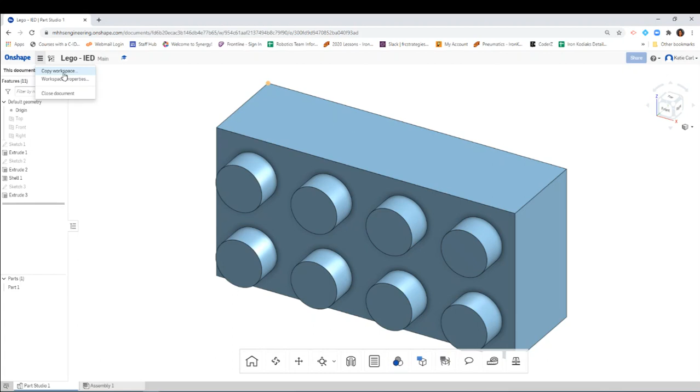Your next step, again, you aren't able to edit this one right away, so you're going to have to make a copy. Go up to the three horizontal lines to the right of OnShape. When you click on it, it tells you copy workspace, so go ahead and click on that option. I'm going to go ahead and change it to my initials and my class period, so KC period 2, and then go ahead and click OK.

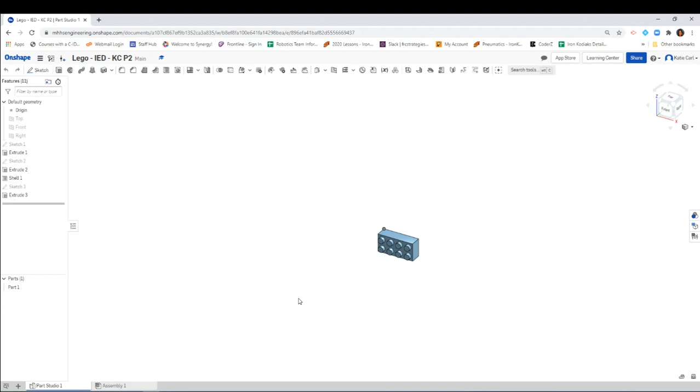All right, now we have a good old classic Lego, and I know many of you guys used to build with Lego, so we're gonna use some of the first basic tools to assemble a few Lego pieces. I know there's only one, but this is the great thing about an assembly - you don't have to recreate the same object multiple times. So we're gonna build something with only a 2x4 Lego, and we're going to put multiple ones in there.

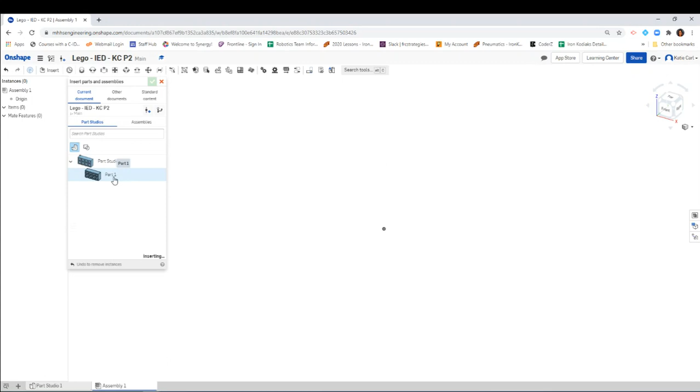Go ahead now and you're going to go to assembly. And if you notice, nothing's in there, okay? You need to click on this insert button. And if you notice, this pops up right here. So I'm going to click on part 1 and click on it once. And if you notice, one of them appears.

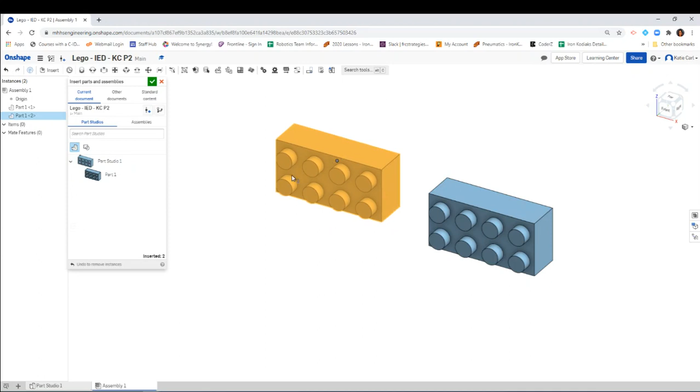If I move my mouse over on top, I'm going to zoom out a little bit. It's kind of hanging out there in space, so it's not going to stay there until you left click once. So I'm going to left click. Now if you note, it kind of goes away, so I need to insert another one. Just go ahead and click on it. I'm going to click on another one, click on it, click on another one, click on it, click on another one.

Okay, go ahead and click on the green check when you're done inserting. You can always go back. Sometimes it's actually really helpful if you only put a few parts in at a time. If you put all of them in, it can get crowded and it can get confusing, okay?

Because you're going to have to be specific as to where you're going to click when we use these constraints and mates up above, in order to assemble things together. So our first step is right now, if you try to click and hold on any of these, they are moving all over the place. That means right now they have all degrees of freedom - they can move up, down, rotate, left, right, in all directions, okay?

So your first step should always be fixing, using a fix mate, one of your key parts to the origin. The reason why that's important is it helps you center everything, especially when you're trying to find your document and look for it using your view cube. So I'm going to go ahead and choose - it doesn't matter which one of the Legos - to fix to the origin, that center mark.

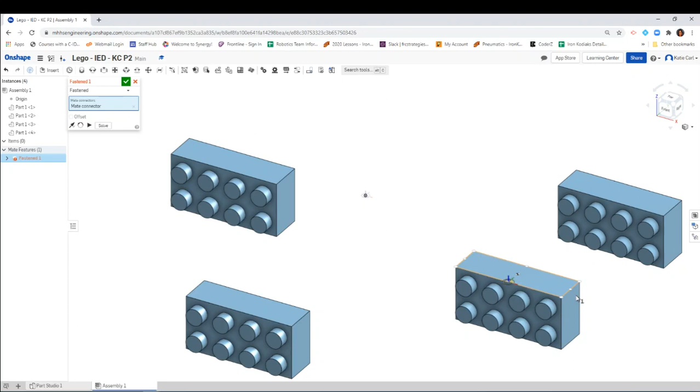But now what that means is I want to fasten it - that's going to be like the bottom corner, right? So I want to fasten it to the bottom corner of one of these, not here, because otherwise it's going to stay rotated this way. So I'm going to rotate my cube or my space and zoom in a little bit, and if you notice it's on this flat space, I can even rotate a little more so you can see.

And I don't want it here. I want it to be right on that corner, okay? And I don't want it on the side because again, they are going to mate. They are going to match up. So you want to make sure that they are aligned and parallel. It's almost as if you're going to add glue, okay?

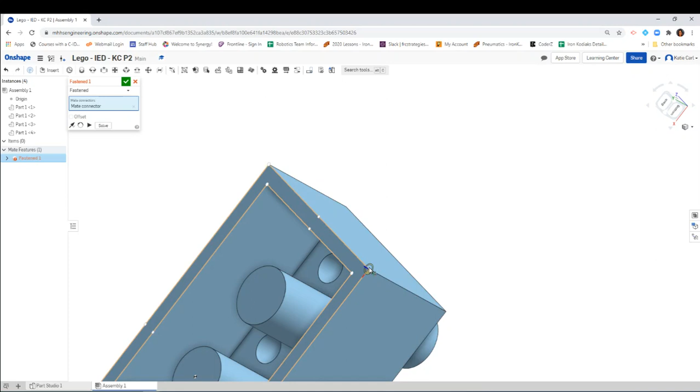So I want to make sure I'm clicking and this plane bottom face is highlighted. And I don't want that corner. I want this outside corner and I want that circle facing that direction. So I'm going to click on it now.

And if you notice, it turned everything. So don't click on this green check. You want to make sure. So go over to this view cube, click on isometric.

And if you notice, awesome, they mated, but my Lego piece is upside down. Don't worry, okay? Remember, it's upside down because we clicked on the circles to face in the same direction.

We want them to be parallel. But you can use these two to kind of switch the axis and switch the rotation. So let's see what happens. Okay, and this will help you figure out your exact orientation before you click the green check.

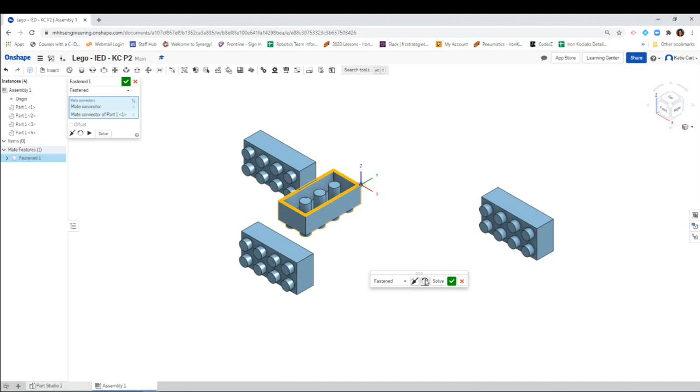So let's see, I'm going to click on this reorientate. And if you notice, it's spinning it around that Z axis. Okay, why? Because remember when I first selected the origin, that Z axis, that blue axis that was highlighted, okay?

So I do want it about there, but now I want to switch the direction. Flip. There you go. I could flip it back if I want to, or I could flip it, okay? In essence, it's kind of flipping it around the x-axis technically.

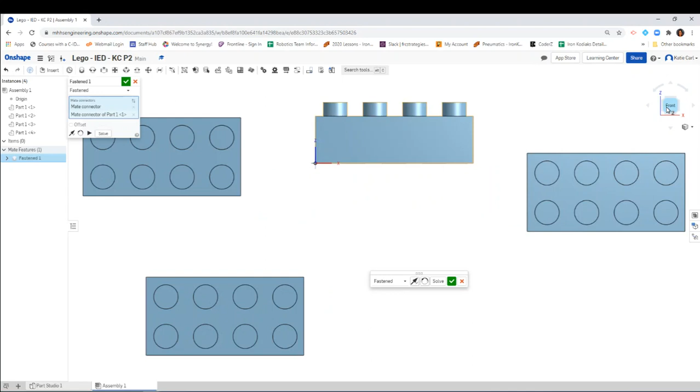But there we go, and that looks perfect, great. That's how I want it orientated. That way when I'm looking at the front, there we go. When I'm looking isometric, awesome. Green check, I'm done, okay?

Now I'm going to close this fasten window and show you a few things. So if you notice, here is that mate that we just did, okay? So if you want to edit it, you can double click it. You can change it, if you want to change it, you can delete these.

If you want there to be an offset, meaning if you want it to be lifted up a little bit, you can do that. If I click on it, it's going to give me the ability to offset it, but I don't want to do that, so I'm going to deselect it.

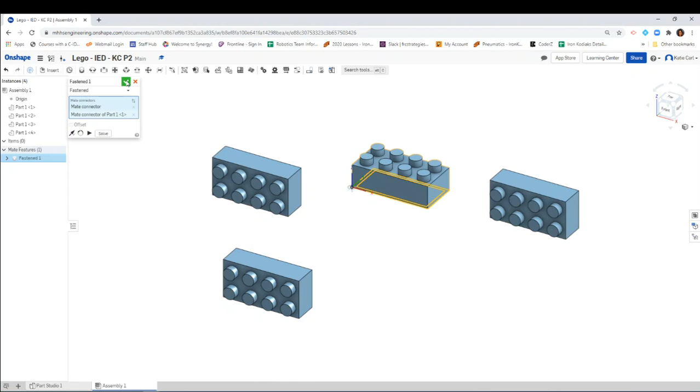Get the green check. And now if you notice, if I click and hold and try to move that Lego piece, it's not going to move, okay? But all of these, they still have their degrees of freedom and they still have every single one, okay?

All right, so now I'm going to go ahead and I'm going to place another piece directly next to it, okay? So I'm going to again use our fasten. Go ahead and click on fasten.

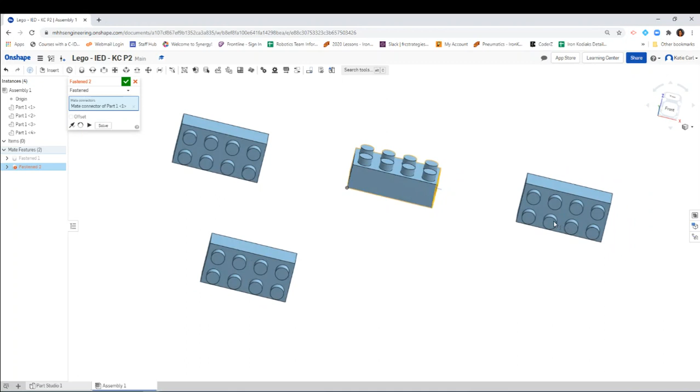And this time, again, I want it to pretend as if I'm putting glue right here, right? So I'm going to click on that and I'm even going to make sure it's directly at the center, right? But I want that to go to this side. And I also zoom in so I can select it directly in the center.

Click to make that stay. And if you notice, they started to fasten. But again, I want this to rotate a little bit. So I'm going to click on that, keep clicking until I get the view that I want.

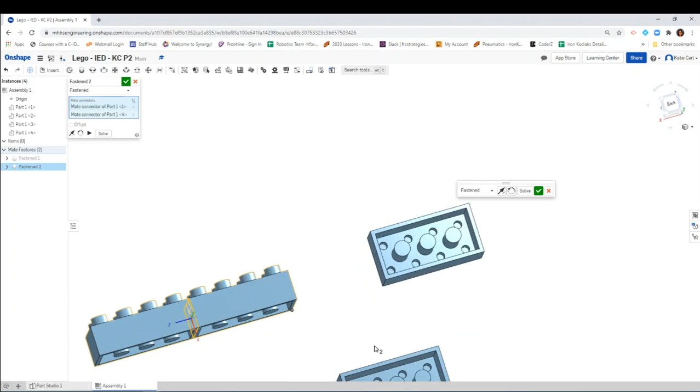That looks great, there we go. Click the green check to confirm. And now if I go back to my isometric view, there we go.

I click to try to move them all. It's not moving. Close that so that I don't click too many times. Awesome, looks great so far.

So I have two mates, specifically the fasten mates, which is like adding glue. And again, it removes all degrees of freedom, okay, which means they can't move anymore once you apply it.

There we go, awesome. Okay, my next step, and another big reason too why we did that is we could use the fasten tool to these two, but they're actually still going to be able to move around. The reason why these don't, these two over here that we started with, is because they're fastened to that origin, okay? They're fastened to that origin.

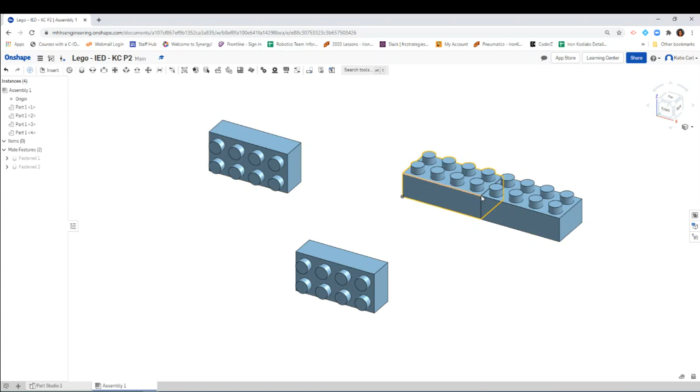So we're going to put one on top and I'll show you how you can actually put it at the midpoint. It's like this Lego piece is kind of in the middle on top, as if you're making a little pyramid. I'm going to use this fasten tool. I want to fasten this space right here, and yep, I want that corner, I want that circle facing in that direction and on the top. So click to make it stay.

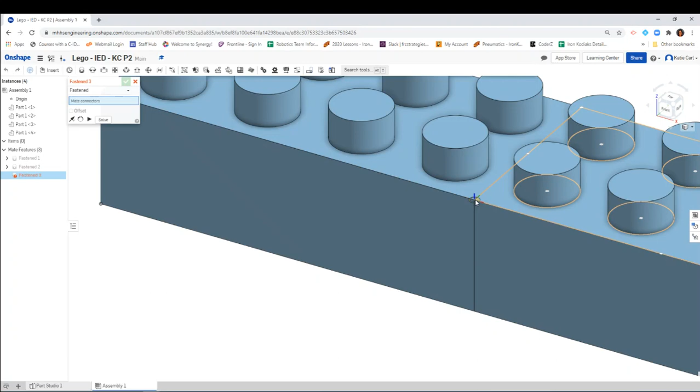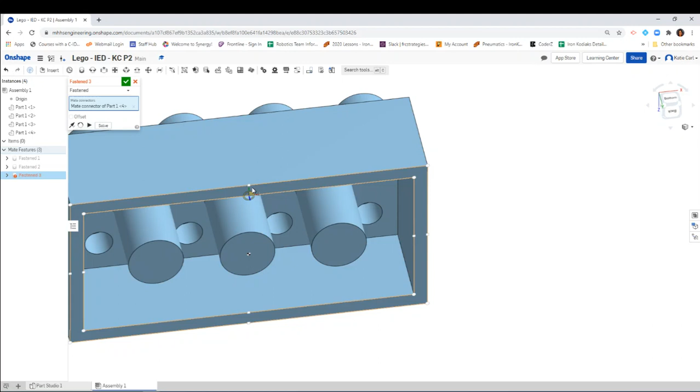I'm going to zoom out because I'm going to go over to one of these pieces. Let's use this one. Again, I'm going to go on the underside of this, because that's where I want those two pieces touching. But I want to be at that midpoint, because I want that midpoint to line up. So I'm going to click to make it stay, and let's zoom out to see what happened.

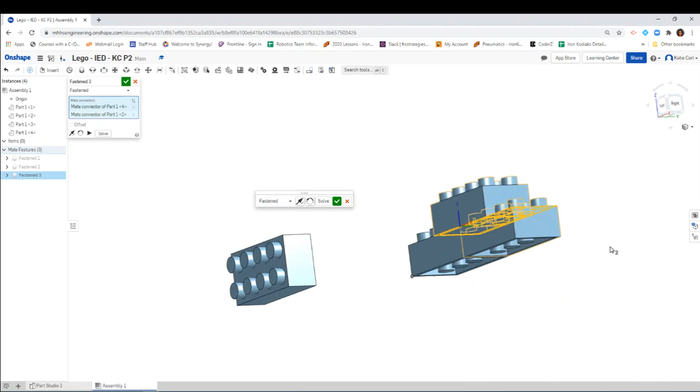Oh, that's awesome. Let's go ahead and switch the direction, and let's flip it up, and there we go. Let's see if we can kind of rotate it around this way. There we go, now it's in the location that I want it to be. I'm going to go ahead and click on the green check to confirm.

Now I'm going to close, and again, I'm going to try to move it. And as I am moving it, or trying to, if you notice, it's not moving at all. So far it is great, that looks good.

You can now try to place this next Lego piece over here, and you can place it any way you want to build an object. The other mate that I would like you guys to also play with is this mate called Slider Mate.

And if you hover over it, this one's a little different than the Fasten. Why? Because it does allow the Lego piece to move, but only in one direction. You can imagine a slider, right? So I'm going to just show you this one, okay?

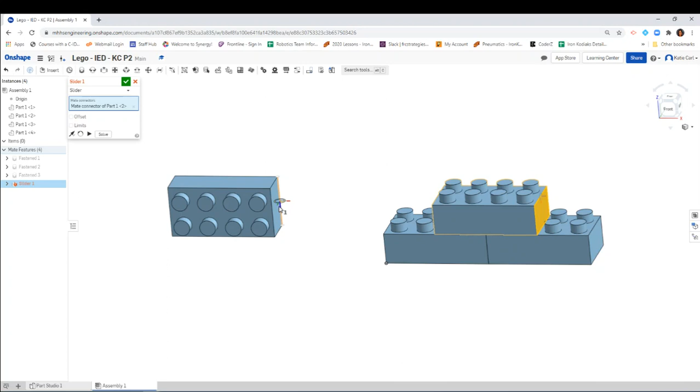Click on slider. I'm going to go ahead, we're going to see if we can do it this way by clicking on, we will click on this face right here, and I want that to line up with this face, but I'm going to zoom in because it's not selecting the face. There we go, there we go. And I want that piece. Zoom out, I want to rotate it again so it's on the top.

Click OK, and let's check to see. Oops, let me close that. And if you notice, it moves left and right.

Again, it's almost as if where you placed the constraints, the connectors, they call them, those little circles with the lines showing the axes, they call that a mate connector. That's even this icon. So if you wanted to add more, you could. But that almost acts as if that will tell you the direction in which it can rotate or it can slide, okay?

If I wanted it to go up and down, then I would have made it the bottom with the top, and then it would go up and down. Okay, so let's see if that works.

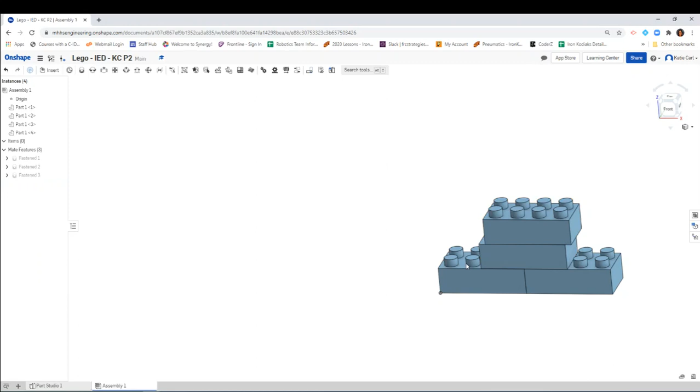So I'm going to go ahead and we're going to test out a different slider. I'm going to right click and edit that one, or delete it. So now I can move it again, right? Let's try this slider again.

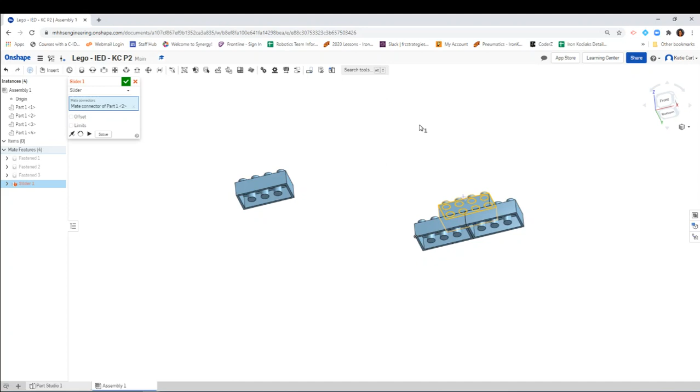Let's go ahead and now let's click on the top of this, but we're going to click on that midpoint on the top, right? And now we're going to go over, zoom out, move over. We're going to go to the bottom of this, zoom in, bottom, not quite there. I want this bottom face in there. Click to make that stay.

Let's zoom out, hit the isometric view so I can see what's going on. Awesome, that looks like it's in the right spot. Click on the green check. Close that window. Now check out which way can it move, up and down, right?

It doesn't quite have clash detection, so it's almost like it's a ghost piece. You can put it inside of another piece, but that allows it to move only up and down. It won't move left and right, it only slides in one direction. So technically this piece has 1 degree of freedom.

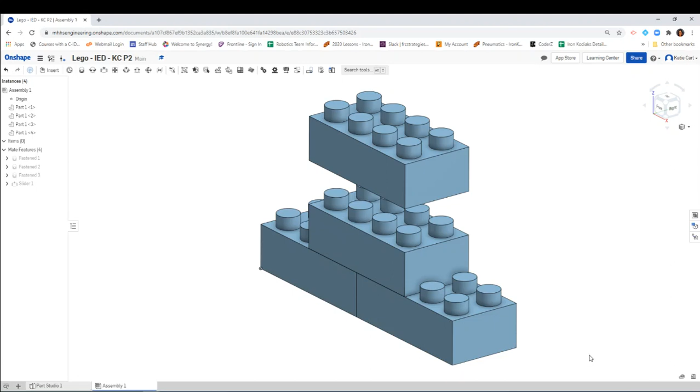Go ahead, start building away.